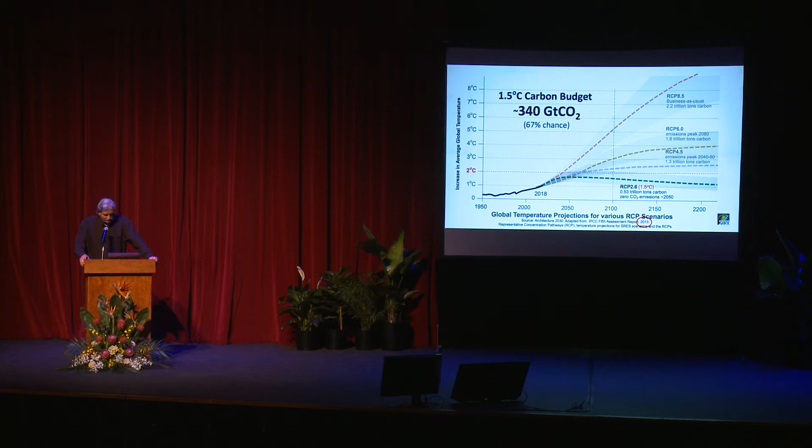Okay, what does that mean? Well, you've all heard the term phase out by 2050. Cities are saying, well, we're going to go to carbon neutral by 2050, we're going to go to a clean grid by 2050. We see that 2050 date has been in the news for some time now, a number of years.

We are roughly now at about 40 gigatons a year - that is what we're emitting globally. If we drew a straight line down from 40 gigatons all the way to 2050, we would burn up 600 gigatons, almost double what our carbon budget is. So the 2050 date is out the window. We burned up too much carbon to this date.

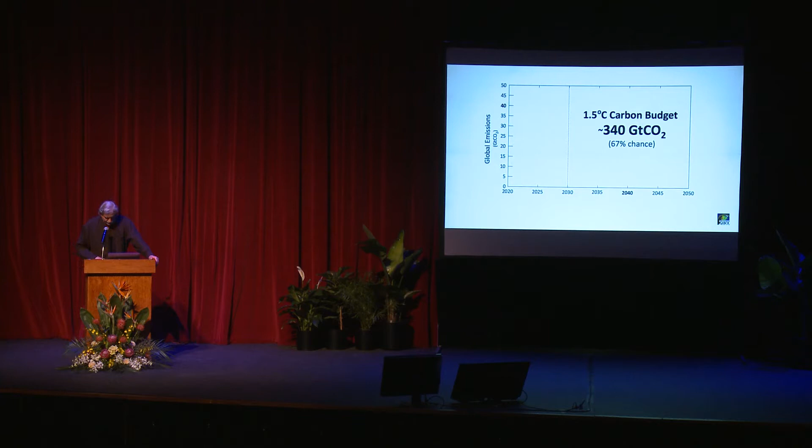So how do we meet the 1.5 degrees C carbon budget, the 340 gigatons, to have a high probability to stay under 2 degrees C? This is what the curve looks like. We need a 65% reduction between now and 2030 of CO2 emissions, and then we have to phase out all CO2 emissions by about 2040. There's a little wiggle room in here, depending upon how close we want to get to the 1.5. But that's what it looks like.

Now, how doable is this? Is this even possible? Well, if we want to peak, we need to peak this next year in 2020, or this year now in 2020. We need to do two things.

We need to call for us in the built environment - this is what our role is. We need to call for no new gas and coal plants and eliminate gas hookups for the building sector. If we do that and we bring in new buildings at zero net carbon, we will peak. So that's how we peak at this point in time.

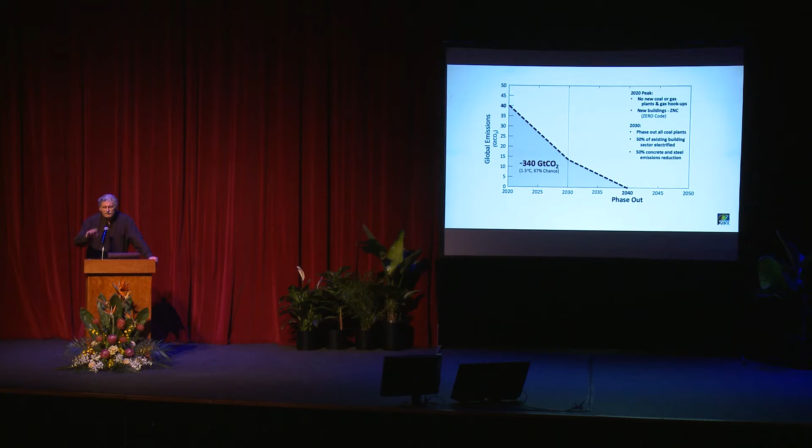And then by 2030, if we phase out all coal plants, and of the existing building sector we electrify roughly 50% of the existing building sector - this is globally - and we reduce the emissions from the average emissions of steel and concrete by 50%, this is what happens if we do those things over the next 10 years.

We get right down into the sweet spot. So all of a sudden, a graph that looks almost impossible to achieve doesn't look so daunting after all.

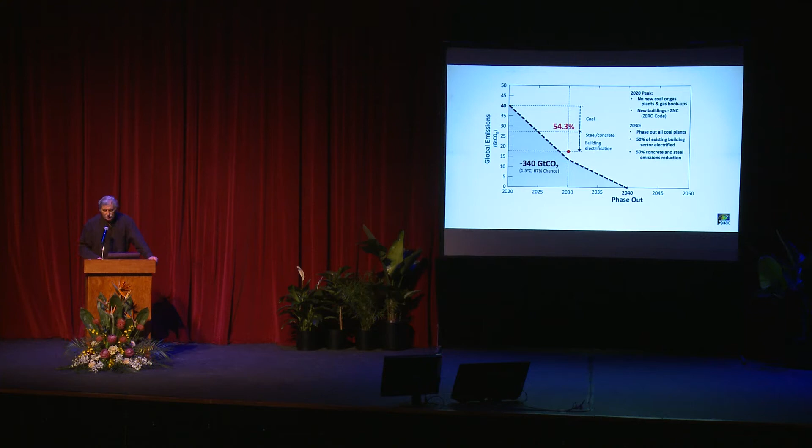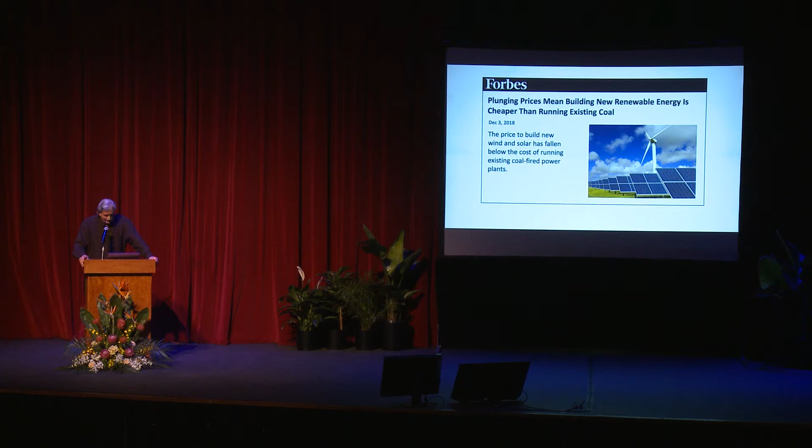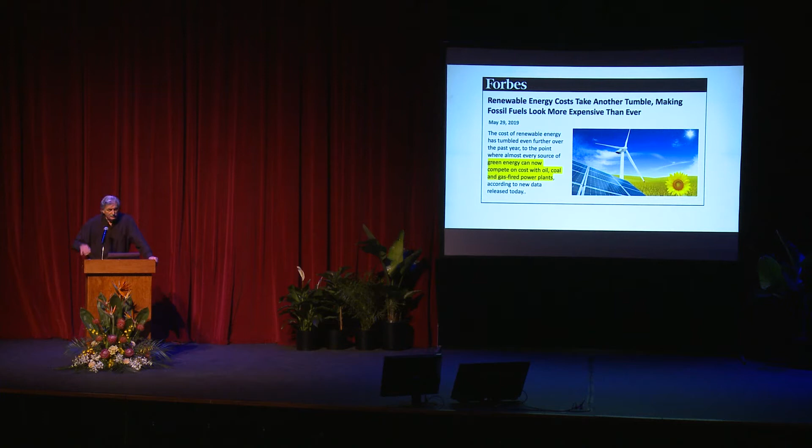And why is that? Well, the price of renewables keeps plunging to where now renewables are much, much cheaper than coal. And we see in the US we're phasing out coal plants at an accelerated rate. And renewables are actually, across the board, reducing dramatically to where now they can compete with gas and oil in terms of generating power.

And we're now starting to see electrification in transportation. So the world's largest bank now says it's inevitable that we phase out oil, and that's coming really, really quickly because renewables and renewable electricity is now competing with oil on the world stage.

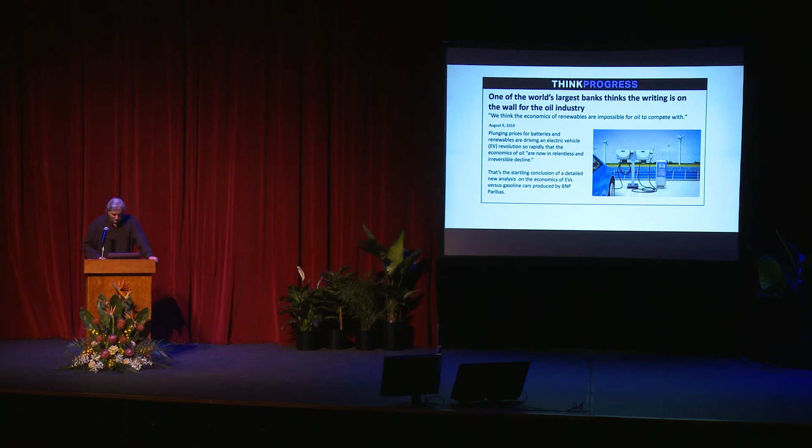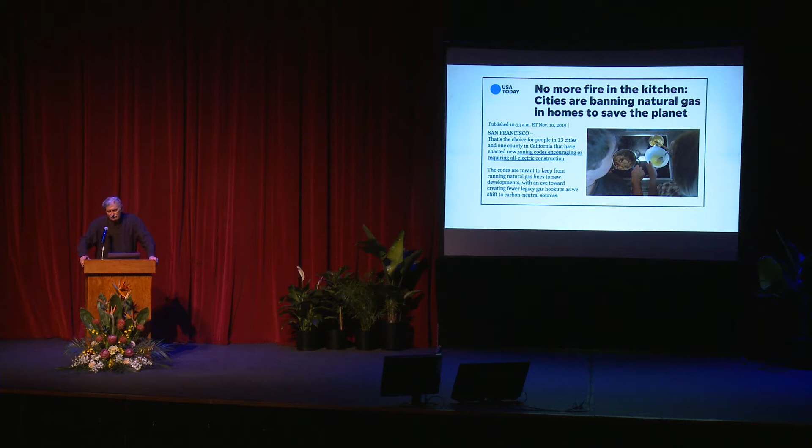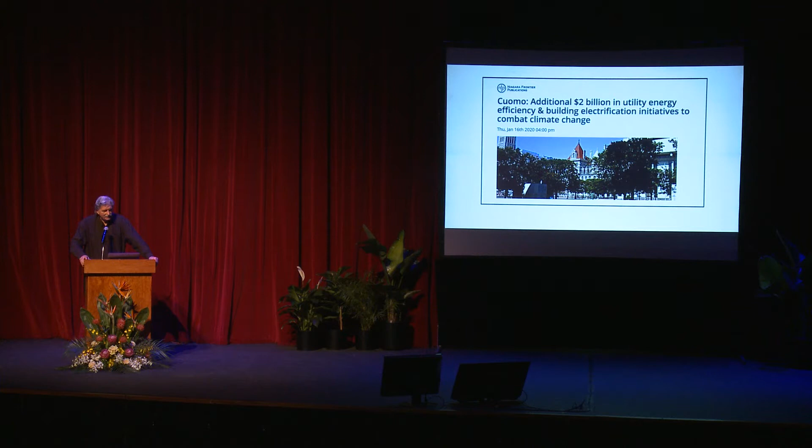Berkeley, a few months ago, 3-4 months ago, enacted a gas ban, no new hookups for new buildings of natural gas. Within 3 months, 13 cities had already passed gas bans in California. It's now over 20 cities, and it's spreading to Massachusetts, New York. The governor just announced 3 days ago, $2 billion to get off of natural gas in the building sector. So this is spreading really quickly.

And even under Trump, renewables this year hit a record high in terms of expenditures and investment. So things are moving fairly rapidly.

So what about that 2.4 trillion square feet? We know that by 2060, roughly, the projections are that we'll double the global building stock. We also know that most of that construction is expected to take place in urban areas, in cities worldwide. And you've heard the term that we're building in New York City every 30-something days. That's where that comes from.

But where is all this construction going to take place? In order to answer that question, how do we get out of this mess? We need to know where all this construction is going to take place so that we can sequence what we do.

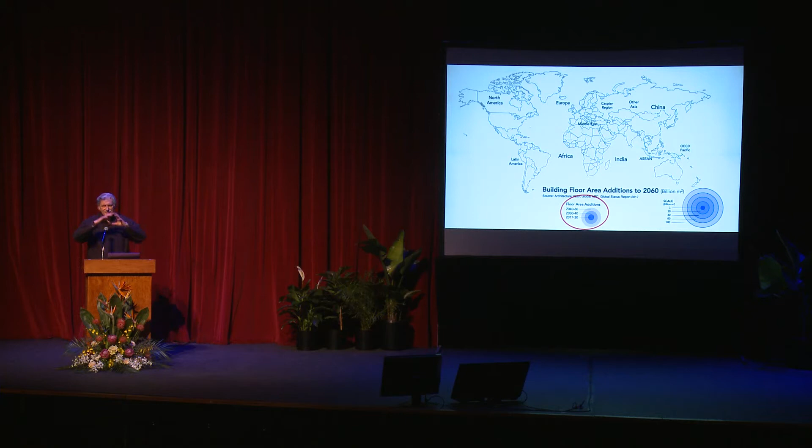It's a map of the world. The darkest dot will be construction between now and 2030, roughly the next 10 years. The circle around that, lighter circle, would be 10 years after that, from 2030 to 2040, and then the lightest circle would be construction between 2040 and 2060, the doubling of the entire global building stock.

So this is the next 10 years. So we see plenty of construction in the US and North America and Canada and Mexico. We still see construction in Europe, and we see construction in China. So in the global north, we see most of the construction. India starts picking up, Southeast Asia, a little bit in Africa, some in Latin America. But really, those three areas, North America, Europe, and China, have a real big role to play now.

Now let's look at 10 years after that. And we see India picking up, Africa picking up, some in Latin America, Southeast Asia. Construction starts to move to the global south from 2030 to 2040. And then from 2040 to 2060, you have an explosion of construction in Africa, India, Southeast Asia. So it's important to get it right in the global north in order to influence what happens in the global south. That has to be the sequence.

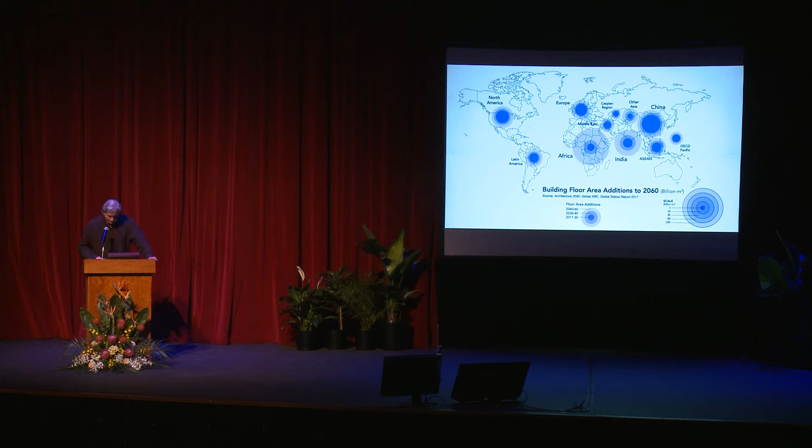So the built environment, what we deal with, consists of three elements: new buildings that we build every day, existing buildings, that 2.4 trillion that we have out there now needs to be dealt with, and all the materials and construction and all the materials that go into buildings and infrastructure needs also to be dealt with, and we'll take them one at a time.

So, new buildings and existing buildings, we understand as building operations. So that's the first thing we need to deal with. So how are we doing with that?

This is US, we'll look at the US first. This is US building sector operations consumption, mostly fossil fuels, from 1995 to 2005. And you can see it's a straight line up at about 45 degrees, and the projections were in 2005 that we would just keep on going because nothing was changing at that time.

In 2003 was the first time we discovered there was even a building sector that was using emissions. In 2003, if you read the headlines in the papers at that time, we were burning down SUV dealerships. There was one burnt down in Denver, and the poster child of climate change and carbon emissions was the SUV. 2003, we discovered the building sector.

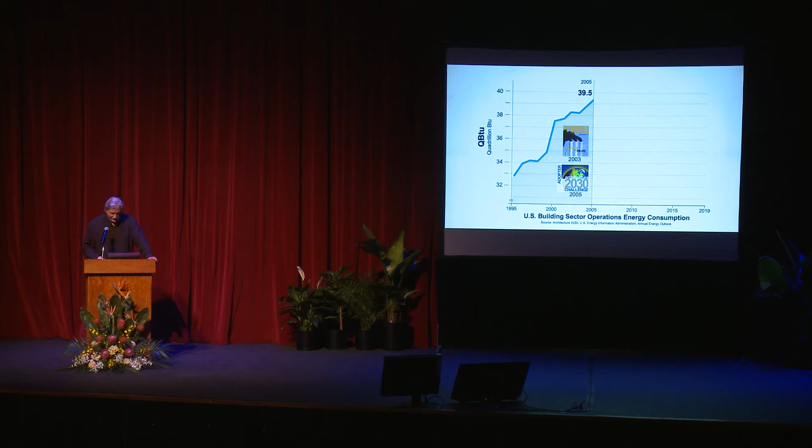We've roughly flattened out emissions. Even though we've added 30, 40, maybe even slightly more billion square feet of building to our building stock during that period, we haven't increased emissions at all. We've actually reduced it slightly. So the building sector is flat. We keep bringing in new buildings, our building codes are much better, we keep bringing in new buildings fairly efficient, and we keep renovating a bunch of buildings. In the US, we have peaked emissions. We have peaked energy consumption in our building sector.

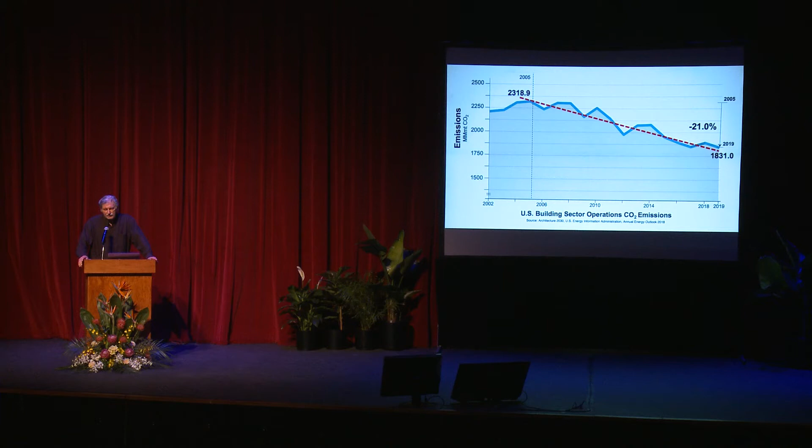What about emissions? This is where we were in 2005. Let me put in motion from 2005 to this year, 2019. We just got in the latest numbers - that's the US building sector greenhouse gas, CO2 emissions. We're down 21% now in emissions in the US building sector. Now, how did we do that?

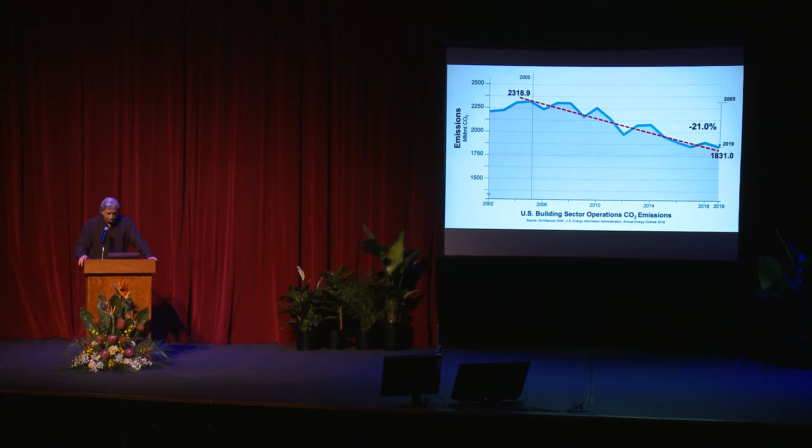There are two things we did. One is every time, if we're not increasing energy consumption, every time we put a collector on a building or we add any renewables, it reduces emissions because it's replacing fossil fuels. And switching from coal to gas, which is problematic, but also reduced CO2 emissions. But we have to get off of gas, so that one's problematic. Those two things combined brought us down 21%.

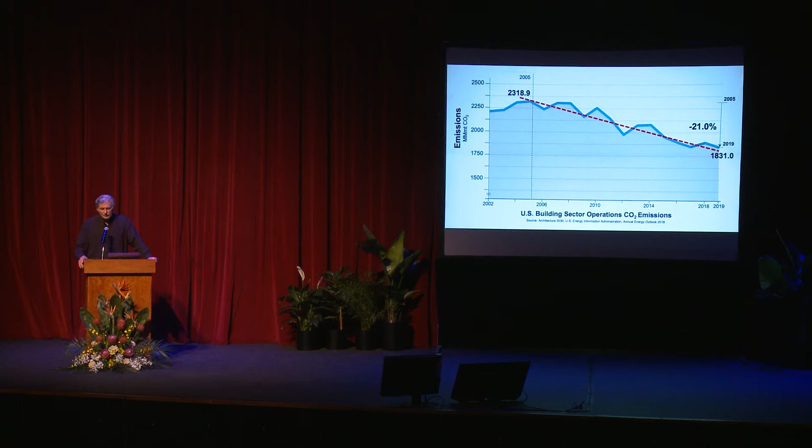So we're getting very close in the building sector to meet the US commitment under the Paris Agreement of 26 to 28% by 2025. However, we have a lot of work to do. That's good for the US. We have a lot of work to do in the rest of the world, but primarily, right now, we need to focus on North America, Europe, and China.

We need a zero code immediately - zero net carbon code. All buildings now need to come in at zero net carbon, so all the renovations we're doing, bringing energy consumption, we need to start bringing that down and emissions down even further. If we bring buildings in at zero net carbon, then every renovation, every collector we put up reduces emissions even further. We don't have to offset all those new buildings. So we developed the zero code.

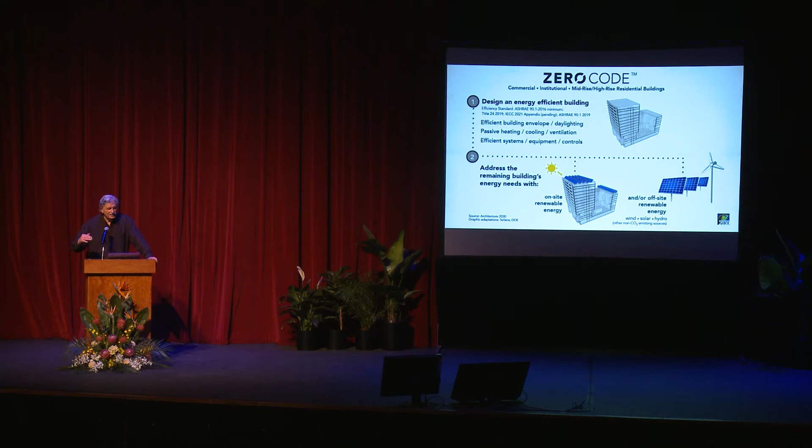We have an international and national zero code, zero net carbon code standard. It's beginning to get adopted. It's fairly simple - you take any efficient code and then add the renewables to it. Our codes are fairly efficient now, and they get more efficient every 3 years. If you incentivize efficiency through the code by requiring the renewables, every time you save $1 through efficiency, you actually save $2 or more because now you don't have to add the renewables or buy them. So by doing it that way, you actually begin to bring those buildings in at zero net carbon, and then all the renovations begin to drive things down.

So we have a zero code now in the US. We were over in China and presented the zero code, and China just released their own zero code. It's called Nearly Zero Energy plus the on-site and off-site renewables. However, it's voluntary now, and we have to start pushing them to really get it adopted in cities in China.

The European Union is mandated - all the countries of the European Union are mandated now to have a zero net carbon code. They call it a nearly zero energy building code standard, so it's nearly zero energy buildings plus the on-site and nearby off-site renewables. This year, every country is mandated to get a code in place in Europe.

So in those three areas that we need to deal with right now, we have a way forward. The question is activating it and pushing it really quickly. The good news is we put in a zero code in the International Energy Conservation Code as an appendix, so that whatever code version you're using - 2021, 2019, 2016 - you can add the appendix and get the zero net carbon. So essentially now, every city in the US and around the world can activate a zero code.

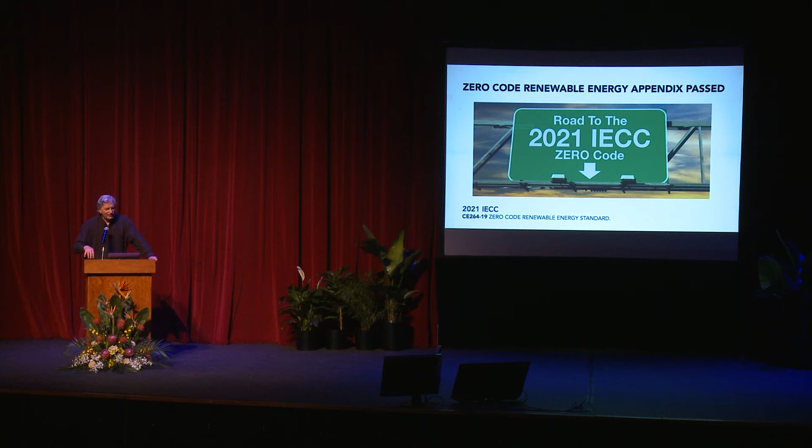What about, that's hopefully the 2.4 trillion square feet we're going to add in terms of emissions - what about the 2.4 trillion square feet of existing building stock? How do we deal with that? How do we develop policies? That has to happen on a policy level. How do we develop the policies for existing buildings?

Well, that's a photograph, an aerial photograph of Seattle. Notice where all the big buildings are - there's a concentration of big buildings in downtown Seattle. And then you see miles and miles - that's not even the extent of the Seattle boundary, but you see miles and miles of small buildings, 1-story, 2-story buildings.

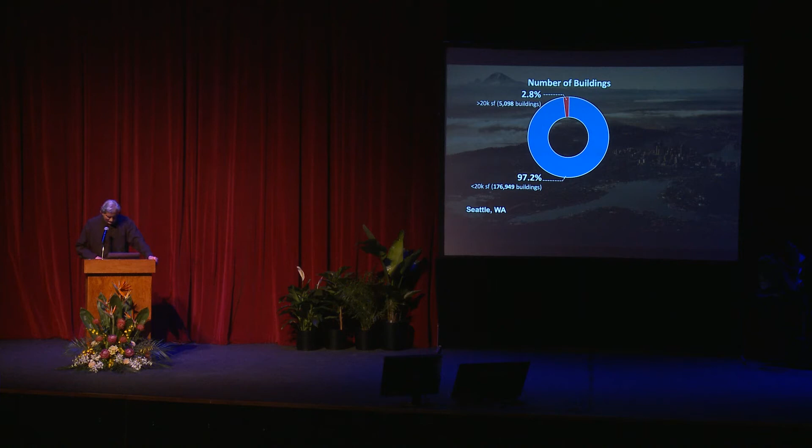And what was equally amazing was that 2.8% of the buildings, those 5,000 buildings, were responsible for 45% of all of Seattle's building sector emissions. So very few buildings are responsible for roughly half of Seattle's emissions, and then you have hundreds of thousands of other buildings responsible for the other half.

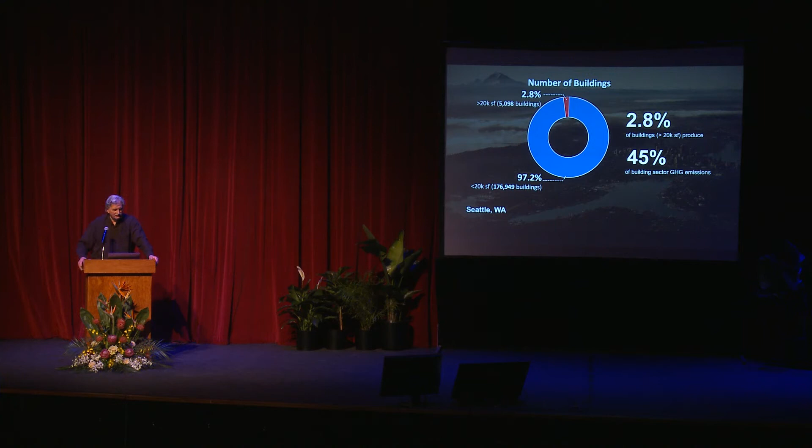We looked at New York, and you see where all the big buildings are: Midtown, Lower Manhattan, and downtown Brooklyn. Then you have miles and miles of small buildings. In New York, the cutoff was 50,000 square feet. Less than 2%, a little over 26,000 buildings in New York, are over 50,000 square feet, the big high-rises in those three areas, and almost 1 million buildings are small buildings under 50,000 square feet.

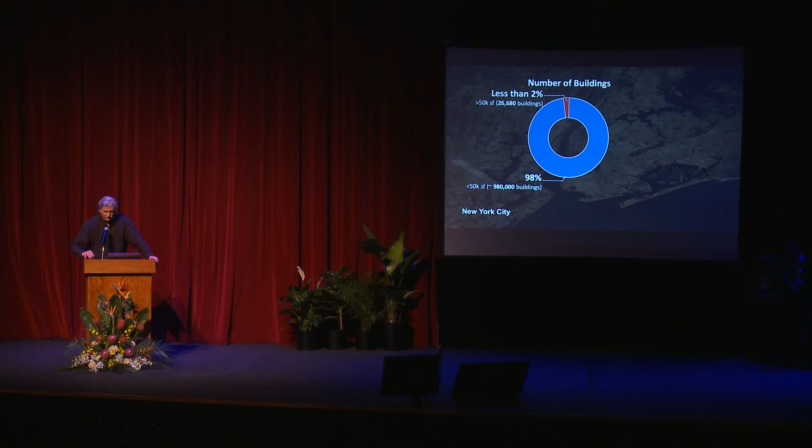Those 2% are responsible for 48% of all New York City's greenhouse gas emissions.

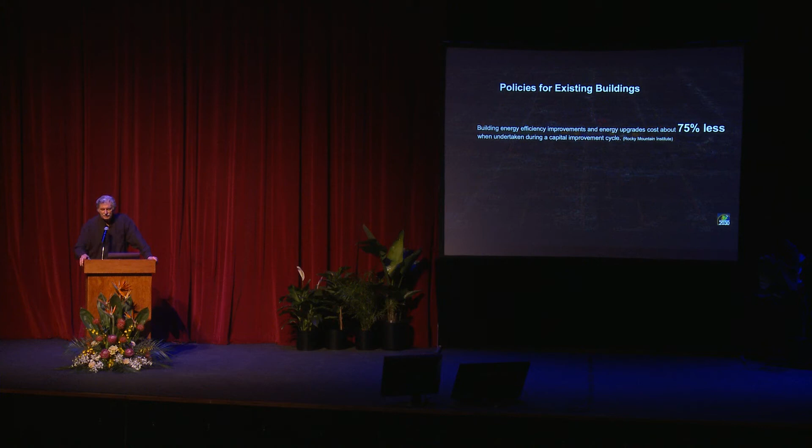We also know that if you undertake energy efficiency improvements or energy upgrades, like trading out boilers for heat pumps, if you hit a capital improvement cycle, it costs about 75% less to do the upgrades. It's actually cheap, the payback is really quick. If you're hitting a capital improvement cycle, all the setup costs are already taken care of, you don't have to redo all that. So if you can hit a capital improvement cycle and target what you do to those points, you overcome the entire issue of cost, the whole economic issue.

So how do you do that? Well, you need policies for big buildings—you have very few of those. And then you need a small buildings policy, which is very different, because you don't want a million people banging on your door saying you're making me do this and you're making me do that. You've got to phase it in at building intervention points.

So let's look at big buildings. How do you develop a policy for big buildings? You require building electrification by 2030. You give them 10 years to hit a capital improvement cycle, and then you require on-site and/or off-site renewable energy to get those buildings to zero net carbon.

And you provide incentives so you don't get them all stacking up in 2030. For the people who want to go early, you give them incentives. You don't have that many buildings, so you give them incentives to go really early, and you spread it out over that 10-year period.

Okay, what about these millions and millions of small buildings? You require electrification at what we call building intervention points, and then you require on-site and off-site renewables. You get over the hump of cost and financing when you do that.

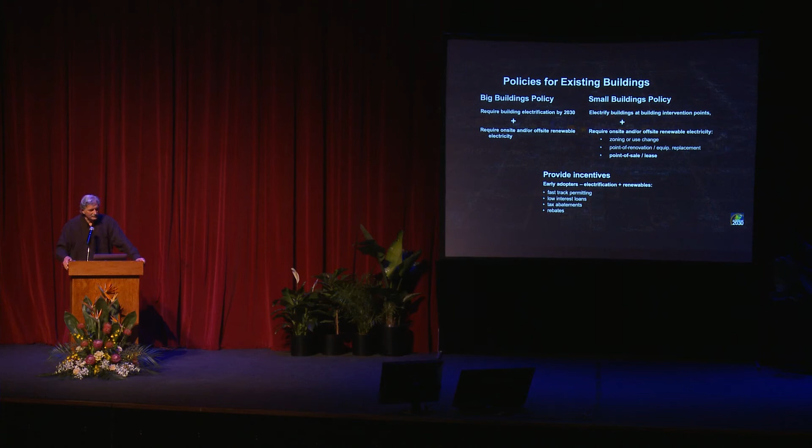Point of a major renovation or equipment change-outs, those are other intervention points. Or if you're coming in for a zoning or use change, you're usually going to upgrade, and you're getting something from the city that increases the value of the property—you need to go to zero net carbon. That's how you develop small building policy, and you provide incentives again for smaller buildings, for people who want to get there quickly, you give them good incentives to do so right away.

So that's how we take care of the existing building sector and the new buildings coming in. What about materials, construction, and infrastructure? 2.4 trillion square feet—roads, sidewalks, water, sewage, electricity, lighting, core and shell. It's enormous, the amount of materials is enormous. How do we get a handle on that?

We call that embodied carbon. Up until 2018, no one talked about embodied carbon. It wasn't until September of last year, in San Francisco at the Climate Action Summit, that we brought up the issue and began to discuss it and talk about solutions.

And why has no one talked about embodied carbon? Think about it—there are literally millions of materials that go into buildings and infrastructure. You have seats, the stage here, screens, lighting, walls, carpet, you name it, it's in a building. Every material that's produced is in buildings and infrastructure in the world. So how do you get a handle on that?

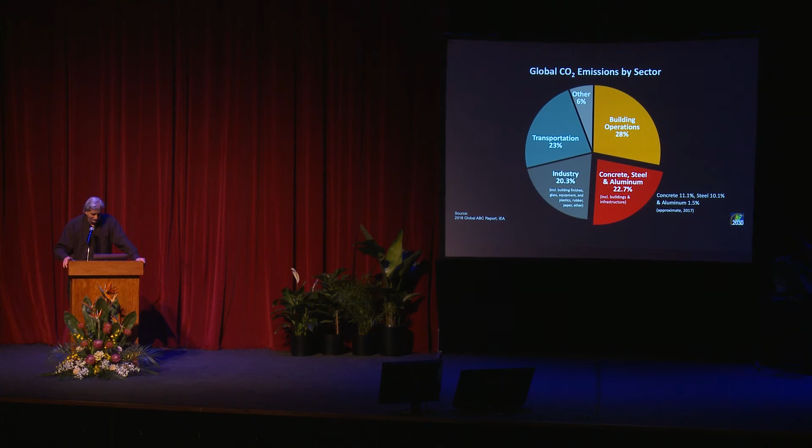Still seemed like a daunting problem to address this issue. So we reshaped the pie again. And we found out that just 3 materials, basically 2 materials, were responsible for half of all industrial emissions and over 20% of global CO2 emissions: steel and concrete. Just 2 materials we have to get a handle on, and we can address half of that sector while we work on the other half. Now it becomes doable.

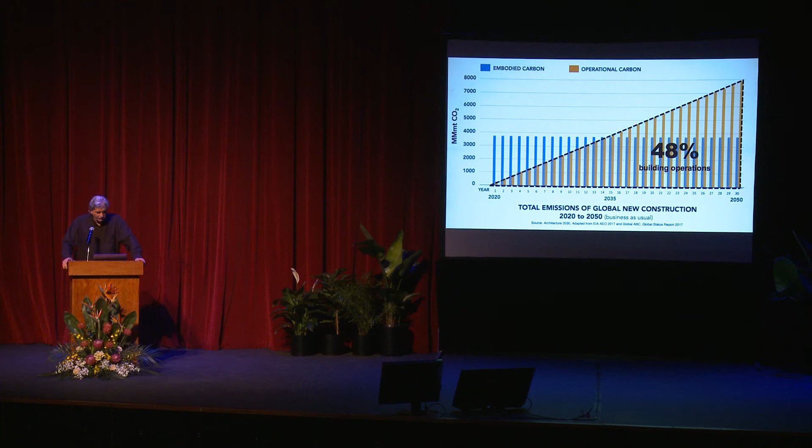That's year three. Now let's take it all the way out to 2050. So between now and 2050, 48% of all the carbon in the buildings built in the next 30 years is going to be building operations, and 52% is embodied carbon. So roughly 50-50 of all the buildings built in the next 30 years.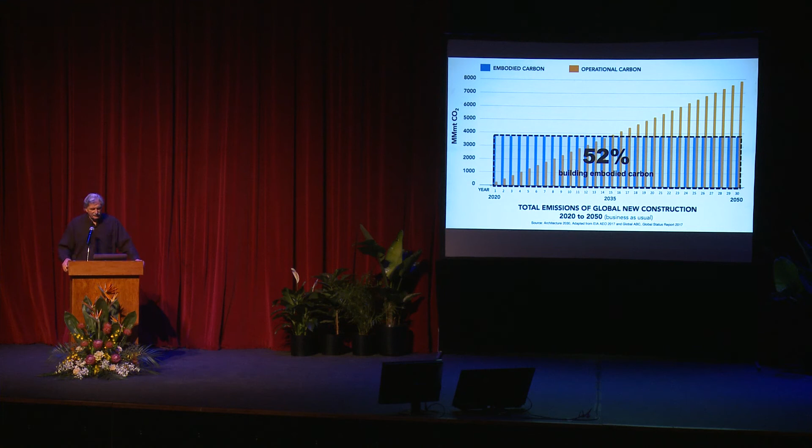However, we saw we have a 340 gigaton budget, and we have to get a 65% reduction in 10 years. So let's pull this back to 10 years, and we see that over the next 10 years, 28% of the buildings built in this next 10 years is operational carbon, and 72% is embodied carbon. And if we get a zero code in place, then all of it is embodied carbon.

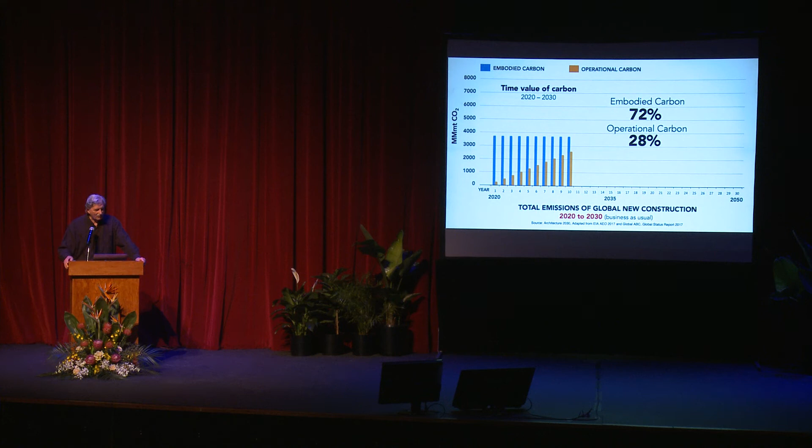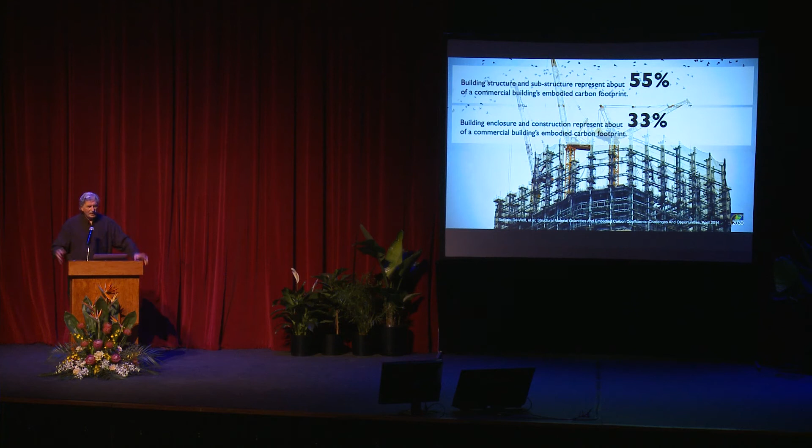So we've got to get a handle on that. We also know that in a building, in just the building sector, 55% of all the embodied carbon is in the substructure and structure. Basically the steel and concrete, 33% in the covering in the building enclosure, and then the rest is in the interior.

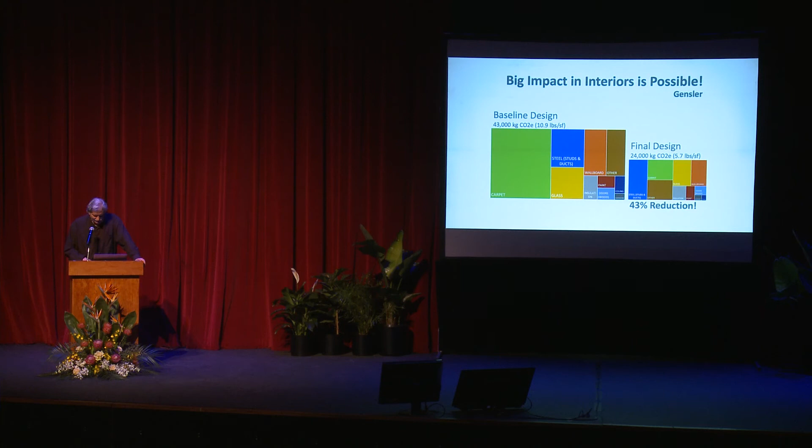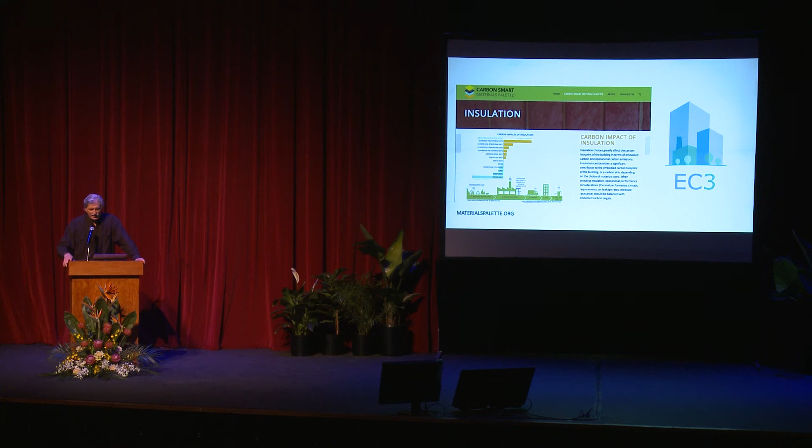We also know that if we're renovating buildings, that we know where a lot of that carbon is. Carpet is huge in terms of carbon. And so we know how to get at that also. And all of a sudden now, in the last 2 years, all sorts of things are popping up. We have a materials palette where we talk about all these carbon issues and how to reduce emissions. We have EC3, which is a new program. We have Tally. There's all sorts of programs now on the market.

So how do we get a handle on embodied carbon? What do we do? Well, the first thing is we have to change the conversation. We have to understand what it is. And we've started that already. And we have to get the word out about steel and concrete, which is huge. It's half of the whole industrial sector. And we're beginning to see now that happen.

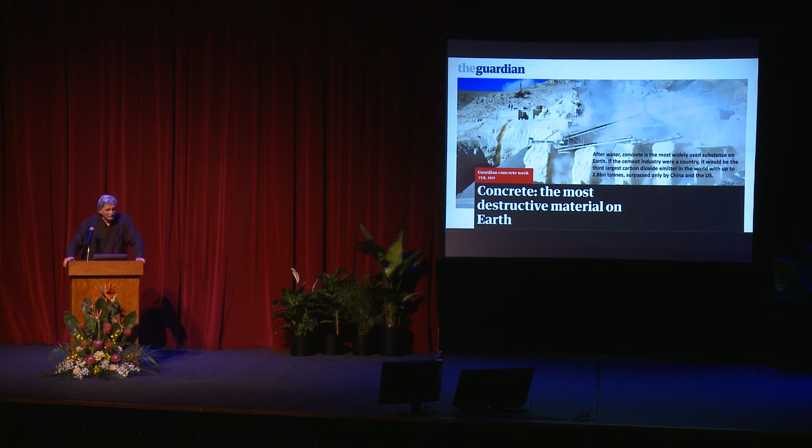Concrete, the most destructive material on earth. It was also in the Wall Street Journal, the New York Times. Everybody's talking about how bad concrete is. The architecture community actually is having meetings. We shouldn't build out of concrete anymore. We should build out of other materials.

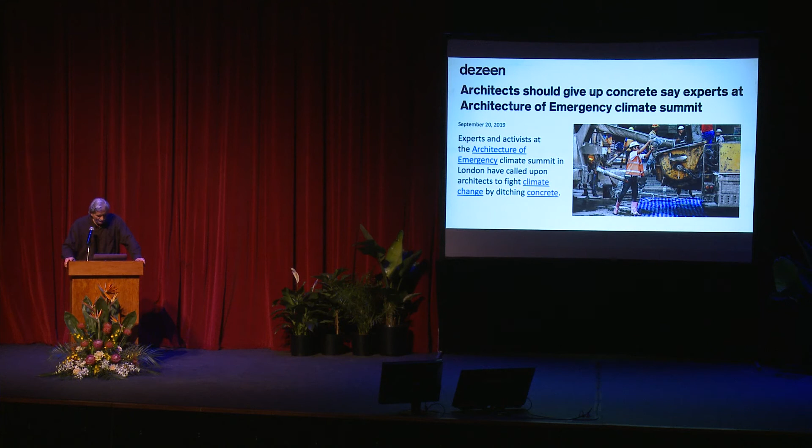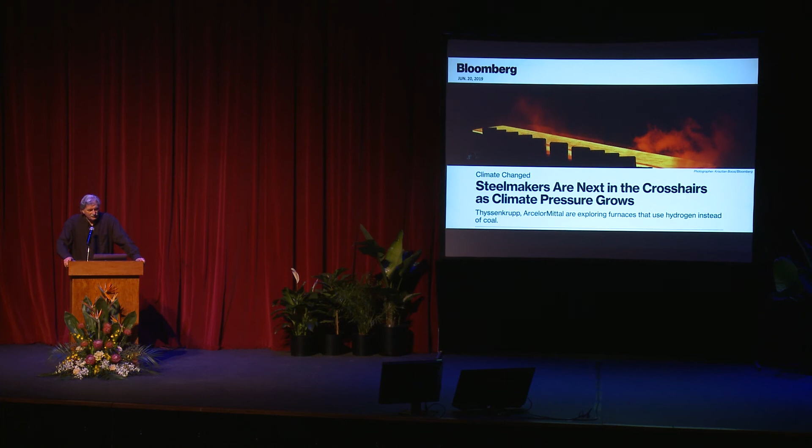And steel not far behind—right after concrete, headlines now show steel makers are next in the crosshairs as climate pressure grows. Mass timber is giving steel and concrete a run for their money. All of a sudden, everybody wants to build out of timber, and we know that if it's sustainably sourced, it actually could be zero net carbon.

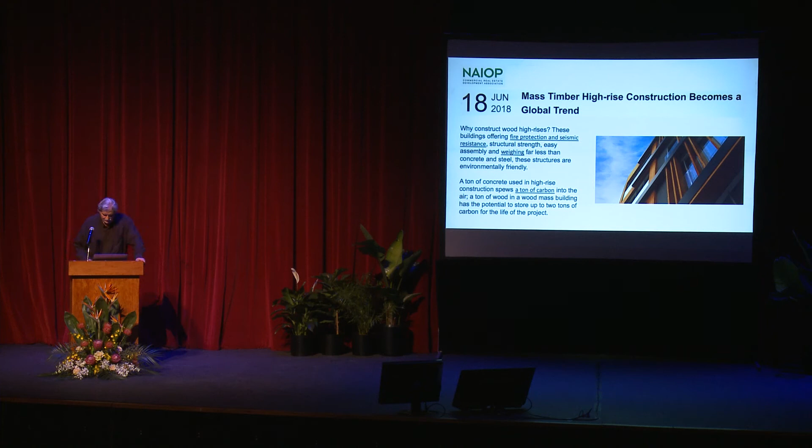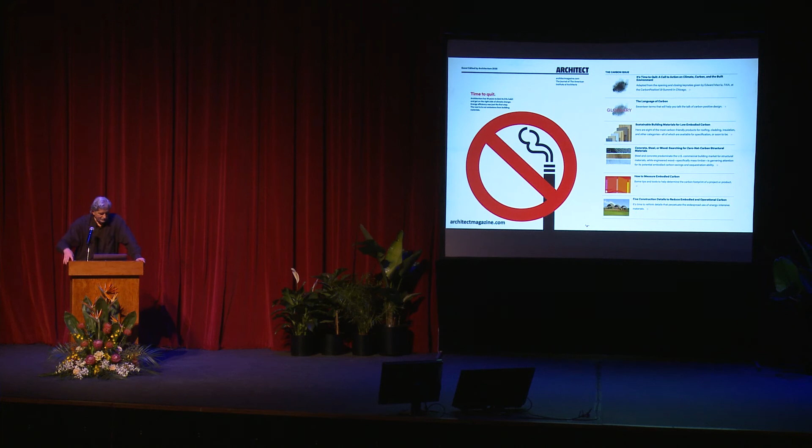The American Institute of Architects and all its chapters have now picked up the mantle. This year they passed a resolution and are working on their climate action plan, devoting almost all of their resources now to climate action. This is the January issue of Architect Magazine, and the entire issue is about quitting carbon—it's time to quit, and roughly every article in there is on how to do it.

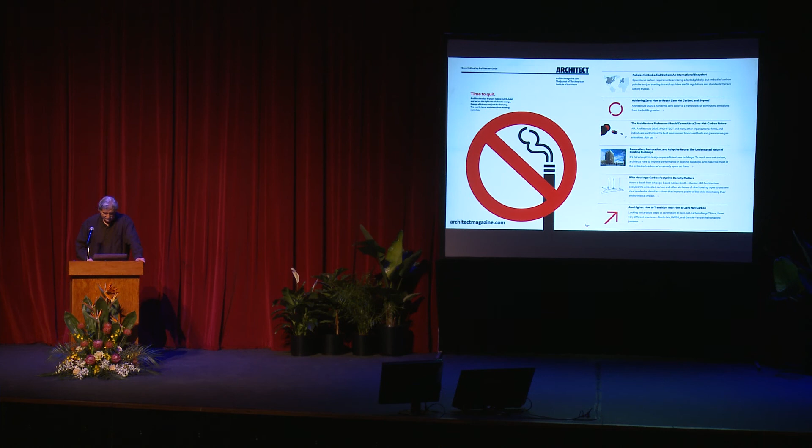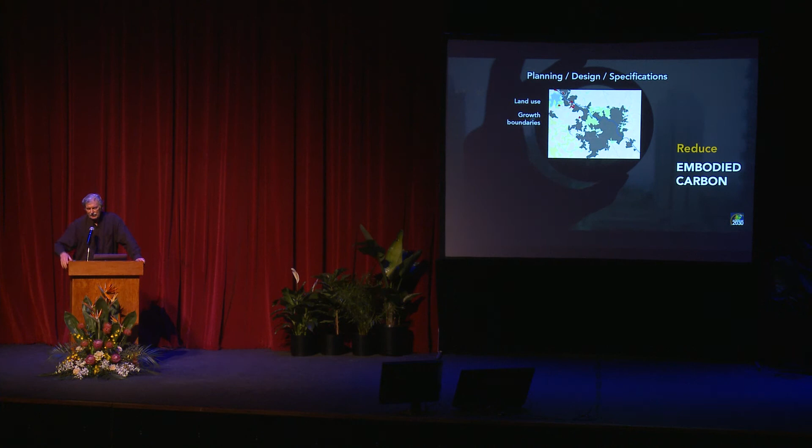So what are the things we now need to do? We started the conversation: we need to reduce, sequester, and reuse within our building community. Let's talk about reducing—that's a planning, design, and specification issue. That's creating growth boundaries so that we densify and don't keep increasing the road structure and infrastructure. We look at infill rather than spreading out.

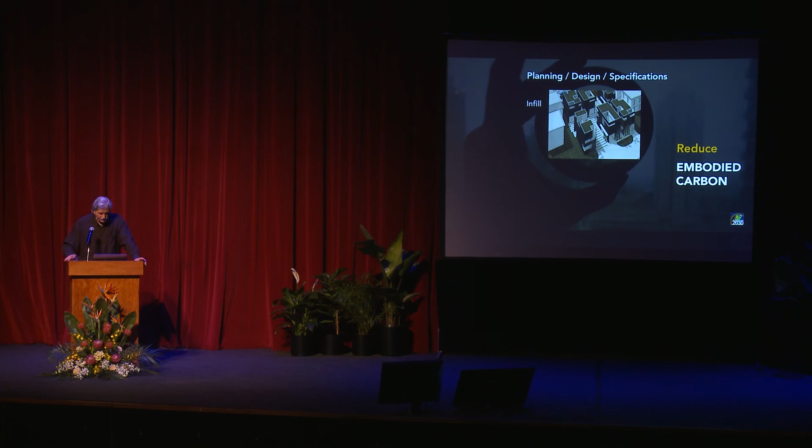At the boundaries of cities, using the infrastructure that's available. We look at optimizing structure so that we're not just throwing extra material at structures and oversizing. We're looking at using low to zero carbon materials that are now coming on the market.

If we just use US steel rather than importing steel, we reduce the steel's emissions from the average by about 50%, because in the US we use electric arc furnaces, whereas everywhere else they use coal furnaces and virgin steel. We use recycled steel and electric arc furnaces in the US, so just that one thing gets us a 50% reduction.

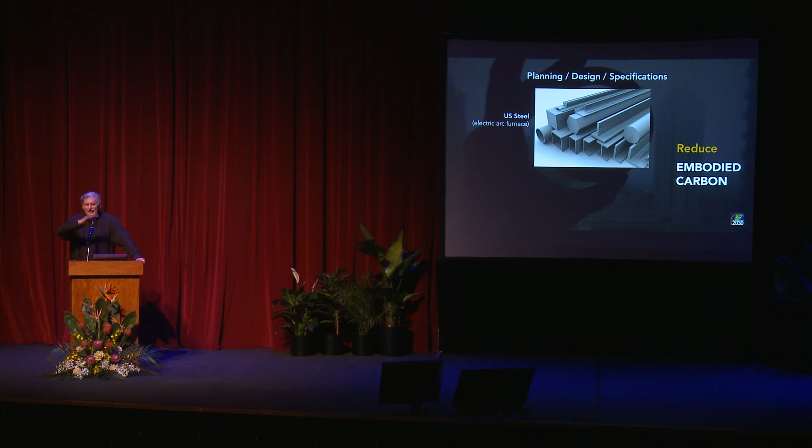And we're starting to see public policy—the first policy now in Marin County on concrete, requiring low carbon concrete.

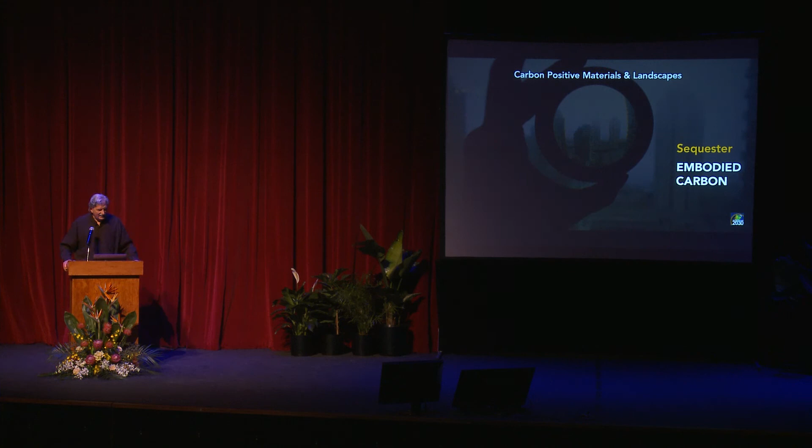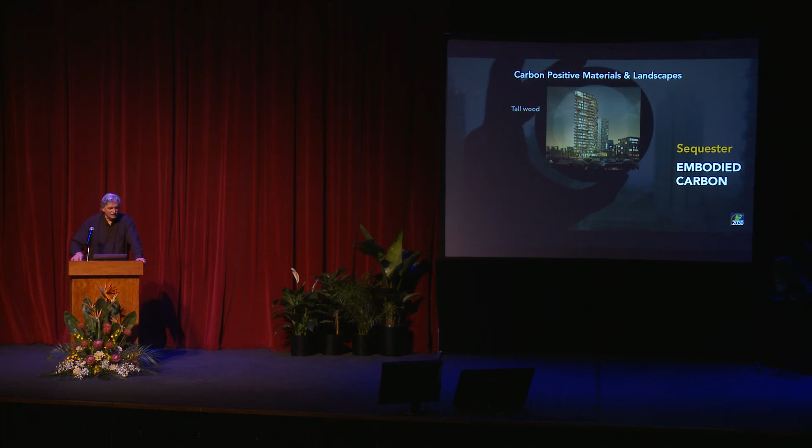What about sequestering? We need to go to carbon positive materials in landscape—zero carbon, carbon positive. Wood is becoming a favorite within the building sector if it's sustainably sourced and harvested. We see, because of the pressure of wood, the building codes changing now to allow high-rise structures made out of mass timber. That just happened last year.

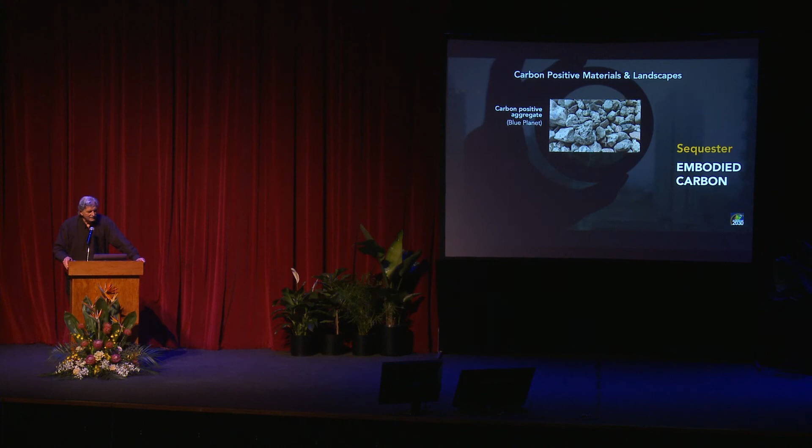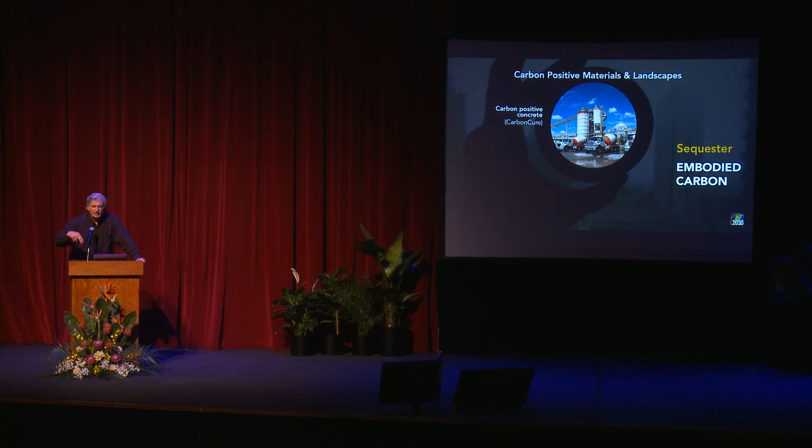We see carbon positive aggregate—actually making aggregate for concrete out of CO2, taking it out of the air, making aggregate, and then sequestering it in concrete. Blue Planet is pioneering that. We see carbon positive block walls. CarbonCure, another company, is taking CO2 and injecting it into the concrete mix to strengthen the mix and change the properties of CO2, so it permanently gets rid of the CO2 in concrete.

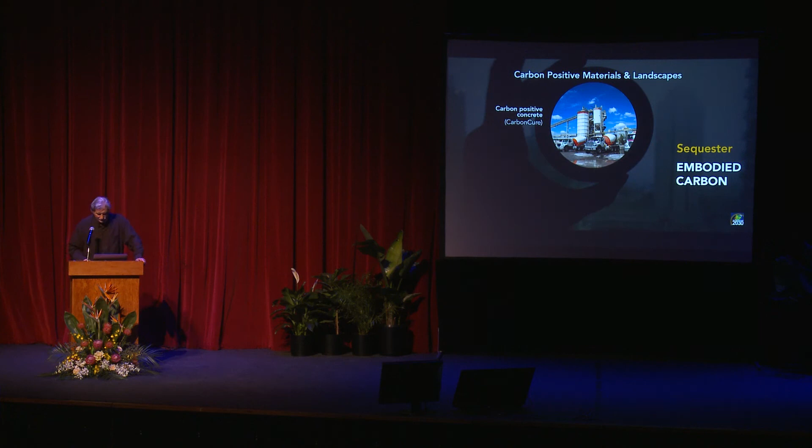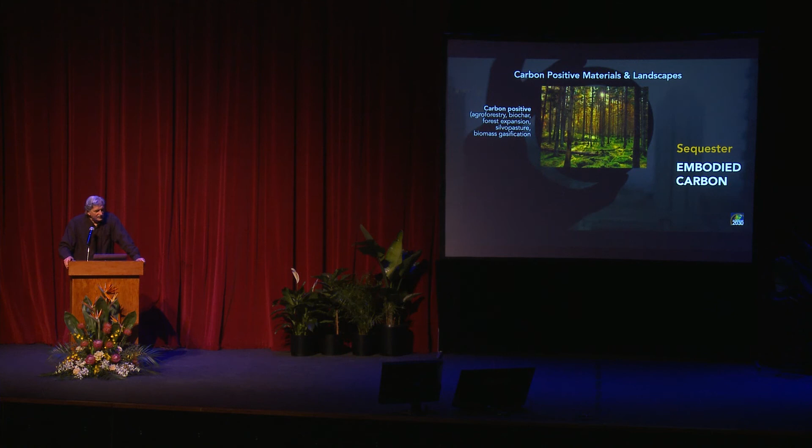And they're now looking at a full cycle plant, taking all the carbon from making the cement and then putting it into the concrete. The first plant will be in Los Angeles. There are ways to sequester carbon by increasing forestry, soils.

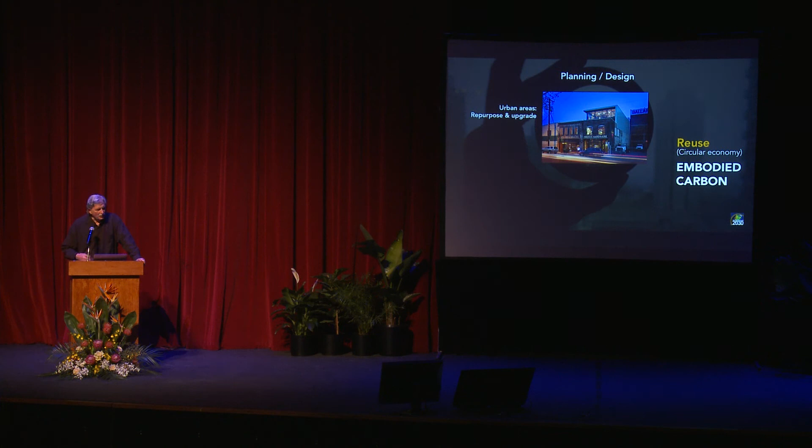And lastly, we talk about reuse. The building you don't build is the building where you save a huge amount of carbon by reusing existing buildings, and those are planning and design strategies—upgrading areas and repurposing areas rather than tearing them down and rebuilding. Adaptive reuse and using recycled materials and local materials to save on transportation. And there's now a whole movement on deconstruction and material reuse, designing our buildings so they can be deconstructed and the materials reused so we don't have to trash them and burn them.

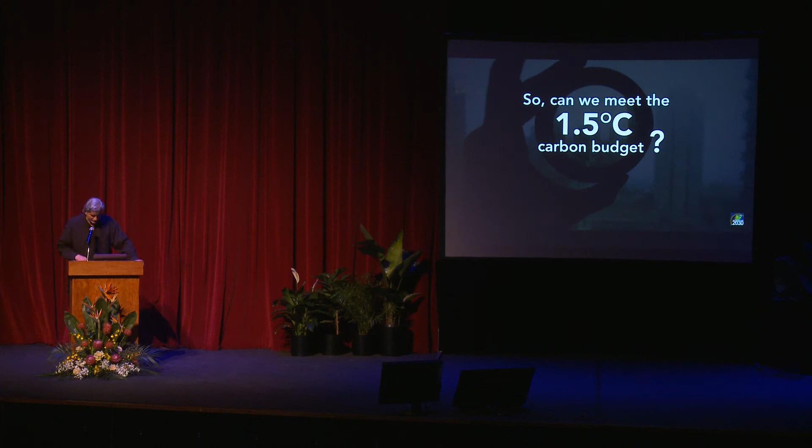So the question becomes, how do we get out of this mess? Can we meet the 1.5 degrees C carbon budget? I'm going to leave you with this thought: this is a scale from 1925 all the way out to 1952—that's 27 years, roughly the time frame we want to get all of this under control.

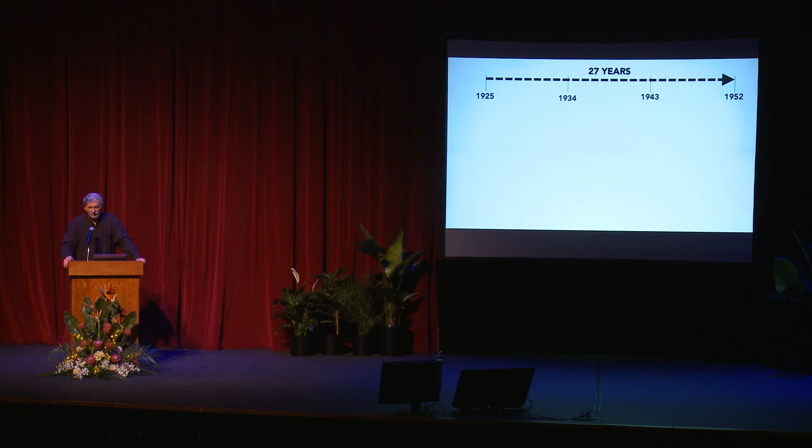In 1925, we had what's considered the first modern building. There were some discussions on which one was first, but it was roughly around 1925, the Bauhaus, where we didn't have just masonry walls and short spans, but now we had concrete pillars and columns and large spans, and we could actually get light deep into a space. So rather than little small spaces, we now open the building up. That was the first modern building, and they hung the glass wall off of the structure, so now the exterior wall was not a masonry load-bearing wall. Considered the first modern building.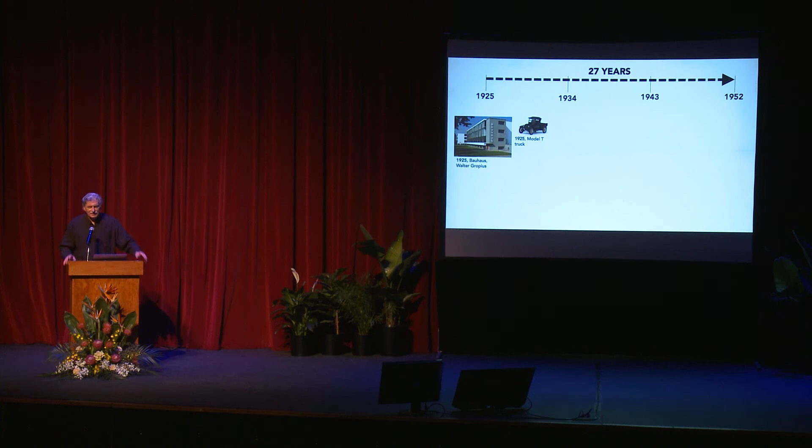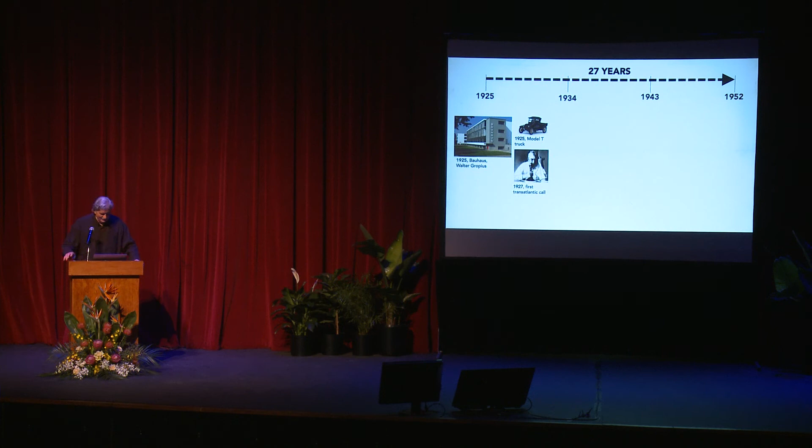At that time, to give you an idea of what things were like, the Model T had just come out before that, and in '25 they added a little piece to the back of the Model T, and that was the first Model T truck that actually came out. So that's what times were like then. In 1927, we had the first transatlantic call.

In 1932, we had an exhibit called the International Style. It took the Bauhaus teachings and everything else, and at the Museum of Modern Art, Philip Johnson created an exhibit called the International Style.

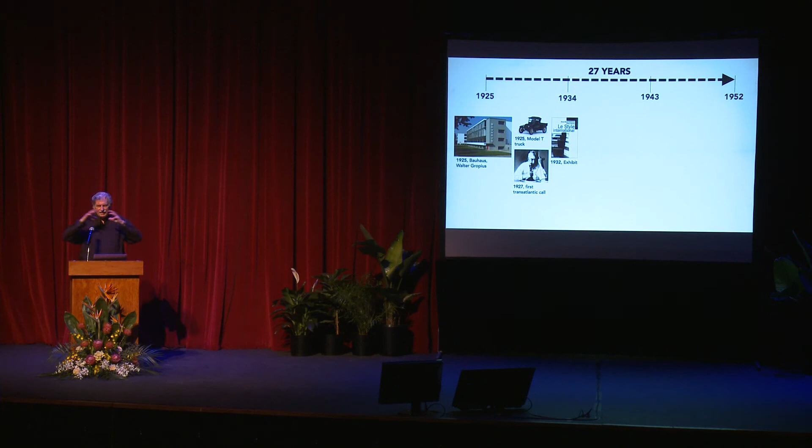At that time, there were no transatlantic flights or anything. You had to come over on a steamer to give a lecture and then take a train somewhere to another university. So it took days and days to do any of that. But the international style then started to happen.

It wasn't until 1935 in Newark that we had the first commercial airport actually taking flights for commercial use. In 1939, Frank Lloyd Wright designed the Johnson Wax building, and you can see the columns, big open space. The modern movement was now well on its way.

In 1949, Philip Johnson did his all-glass house, single glass, by the way, in New Canaan, Connecticut, a really cold climate, demonstrating that we could overcome any climate and create that indoor-outdoor environment by just using cheap fossil fuels.

By 1952, we had high-rise buildings built with single glass curtain walls and panels all around the world. The entire world by the 50s was totally transformed. So from 1925 to 1952, over 27 years, we transformed the entire world.

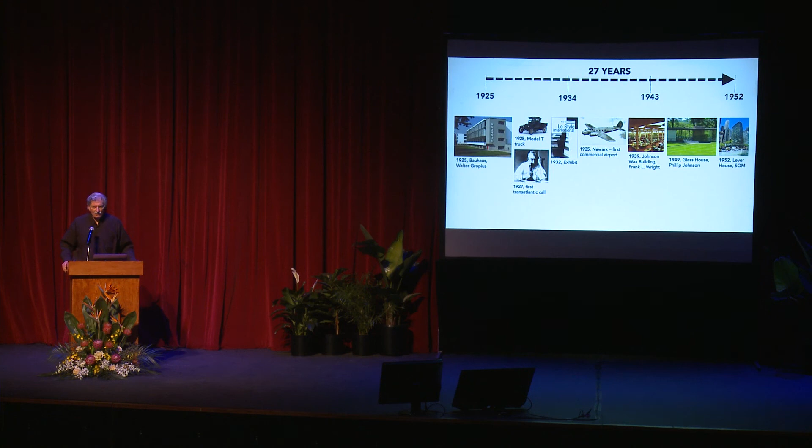Now, all the buildings were rectangular, and that was because of the materials we used to design all those buildings during that period. There was a T-square and a triangle.

You see the ink pen. It had two prongs. You had to dip it in an inkwell to get the ink into those two prongs, then clean it off, and then draw a straight line with the triangle and T-square. And we had bumwad at that time as a great term, so I thought I'd put that in there. We used sketch at that time. It's pretty primitive. It took years to develop a set of construction documents.

And when you draw with the ink pen, it would invariably leak under the T-square and the triangle, and you'd get a big blob of ink on your drawing, and the only way to get the ink off was with a razor blade. There were no erasers to do that. So think about how long it took.

Now, the Lever House was built during that period. These are the tools we had to design the Lever House. Think about how long it took to do that. And then the Seagram's building, huge skyscrapers, were done with those materials.

And there were no curves. We had French curves, and we could draw a curve, but you couldn't dimension a curve in 3 dimensions. So every building built, except maybe a half circle, every building built in the world was rectangular.

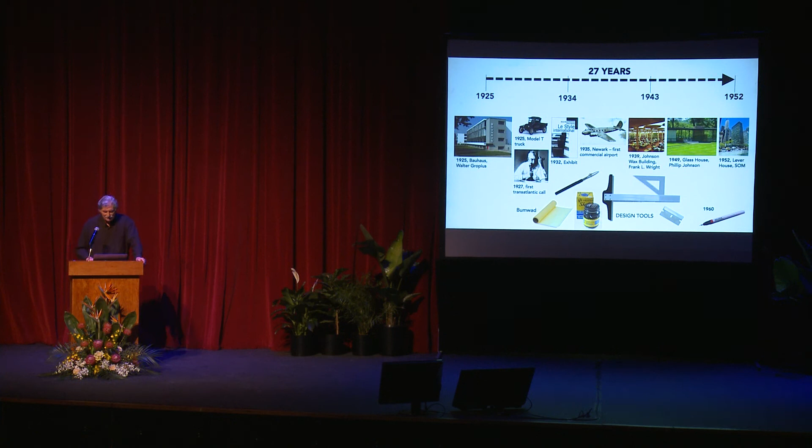And for structures, we had no computers. Everything was done by slide rule. The great invention was the rapidograph, which didn't come in until the 60s. This was after all these buildings were built. You could actually draw a line, not get the ink to leak under, and it wouldn't take you years to do a set of drawings.

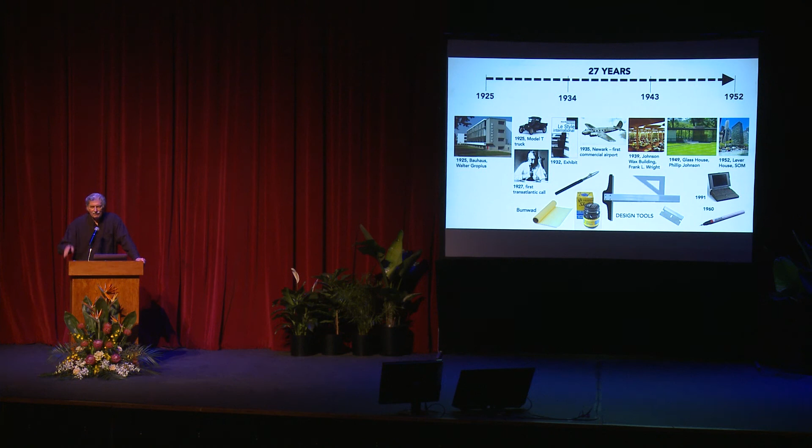The first Mac didn't come in until the 80s, in '84, and not until the 90s did we have the first laptop. So we changed the world in 27 years with primitive materials that took forever to get things done. Think about what we have now and how fast we can do things. So when we talk about between now and 2040 that the world is going to change, we have all the tools we need to make that change happen.